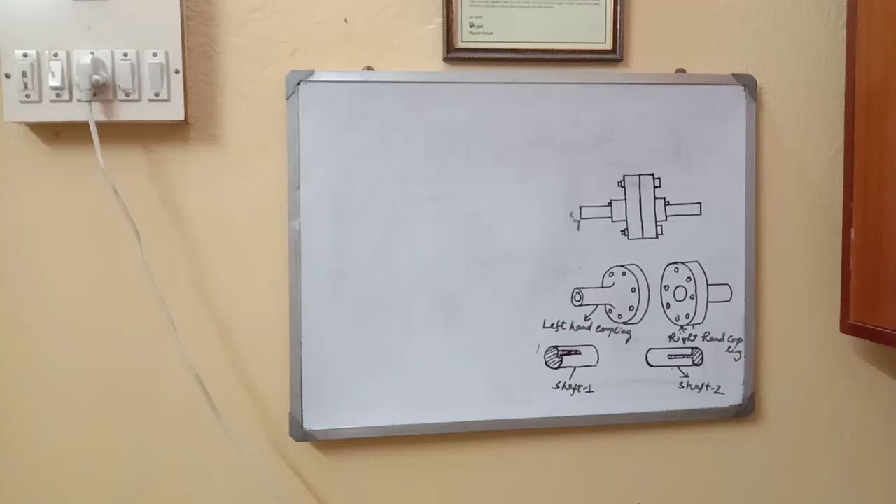Hello friends, today in this video I will discuss about the coupling.

See, when there is a shaft, as we know, the shaft is the rotating member. When the length of the shaft is too long, then we don't make the shaft in a single piece, because it is difficult to transport such a shaft. So, for simplicity, what we do is make the shaft in two pieces. That is, instead of transporting a complete length of the shaft, we divide it into two halves, and these two halves connect with a device which is called coupling.

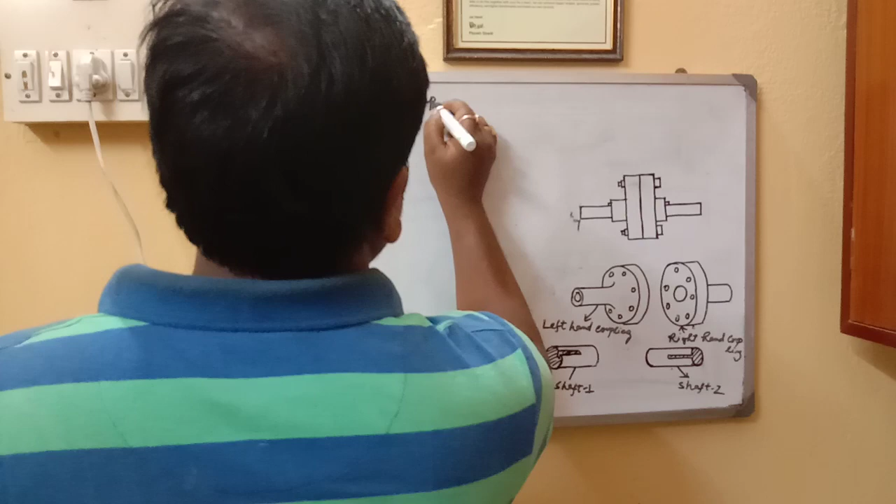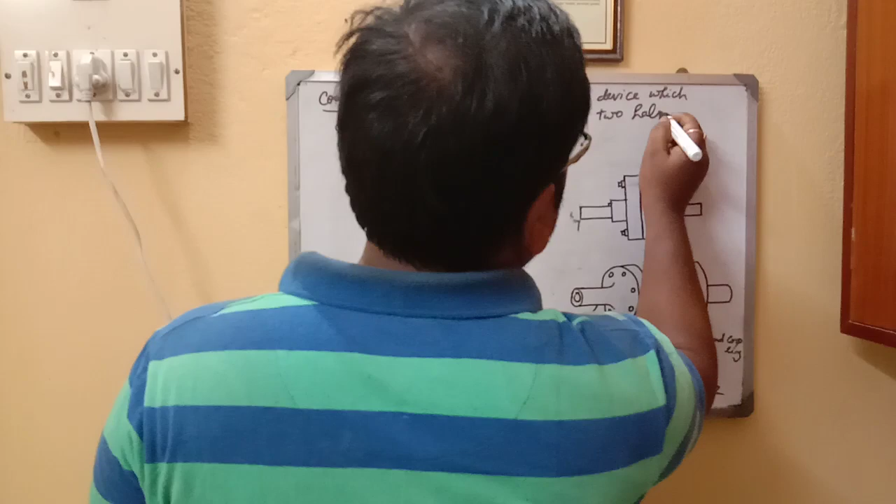So coupling is the mechanical device which connects the shaft which is in two halves. So coupling is the mechanical device which connects the shaft which is in two halves.

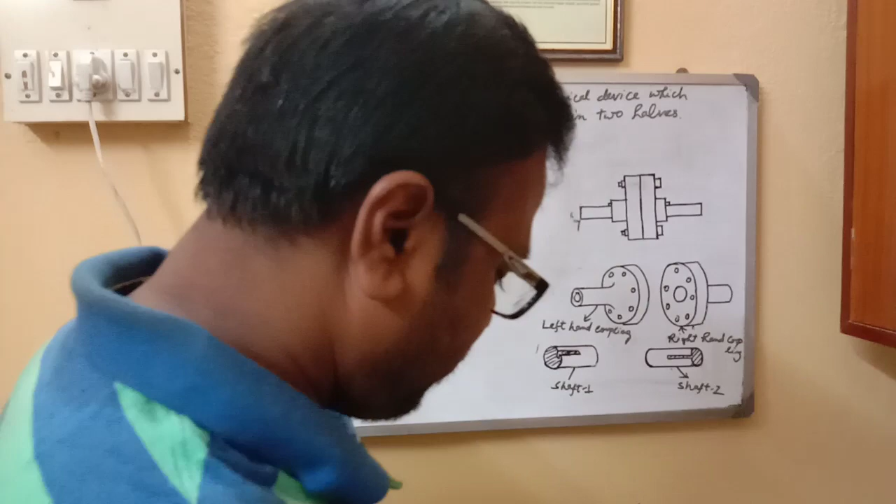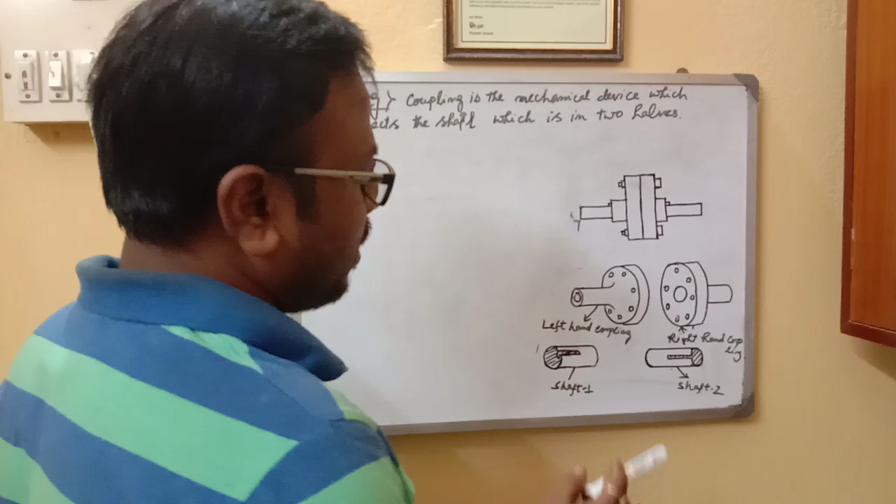So friends, here you can see the diagram. This is shaft 1, this is shaft 2. This is left hand coupling and this is right hand coupling. Here the coupling is in the left hand side, so it is left hand coupling, and the coupling is in the right hand side, so it is called right hand coupling.

Now how does the connection take place? Firstly we take shaft 1, which we insert in the left hand coupling using a key, and after that we take shaft 2, which we insert in the right hand coupling using a key. Half portion of this key will be in the shaft and the other half portion will be in the coupling. Now after inserting the shaft in this coupling, we join this coupling.

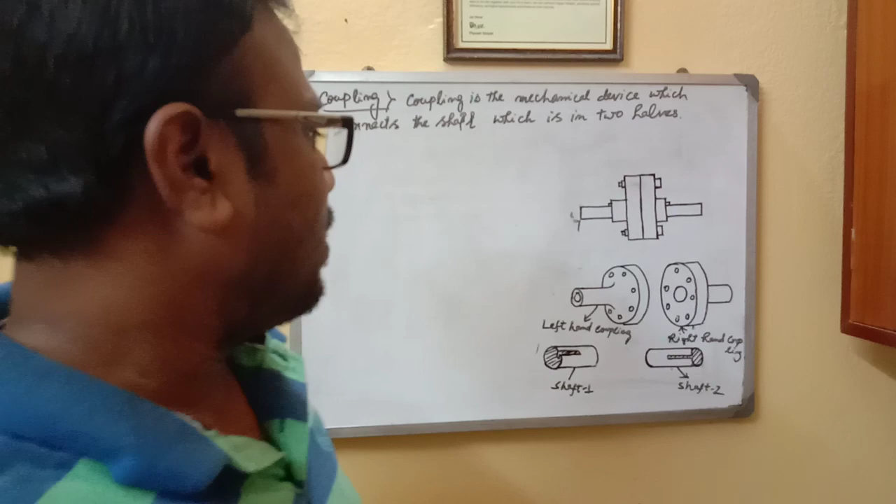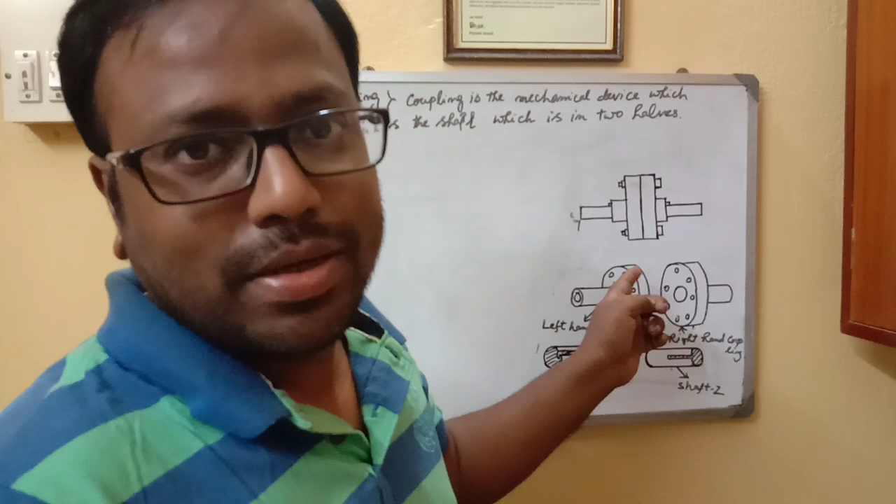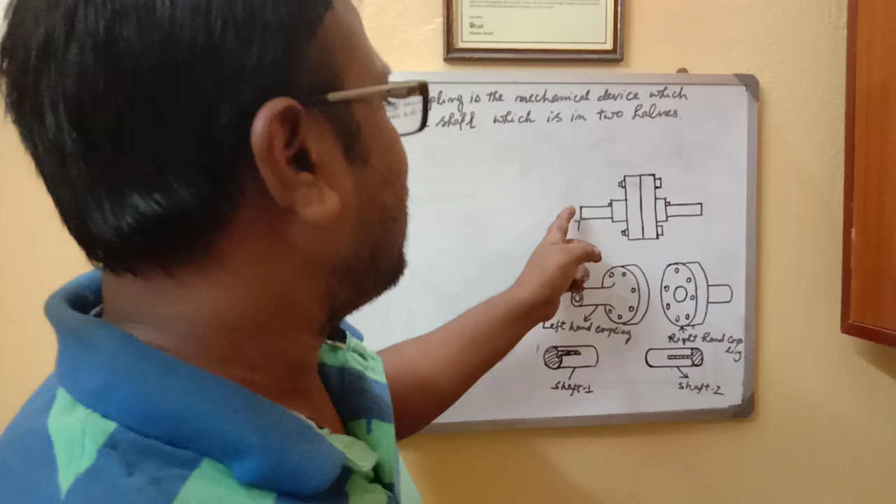Now friends, you can see here the number of holes provided on the coupling, and these holes should be aligned. After aligning these holes of both couplings, we insert the bolt, and after that we use the nuts for tightening, so that it becomes a single unit. Now it will look like that. Now we give the power to any one of the shafts, and that shaft will rotate the other shaft, and power will be transmitted through this coupling.

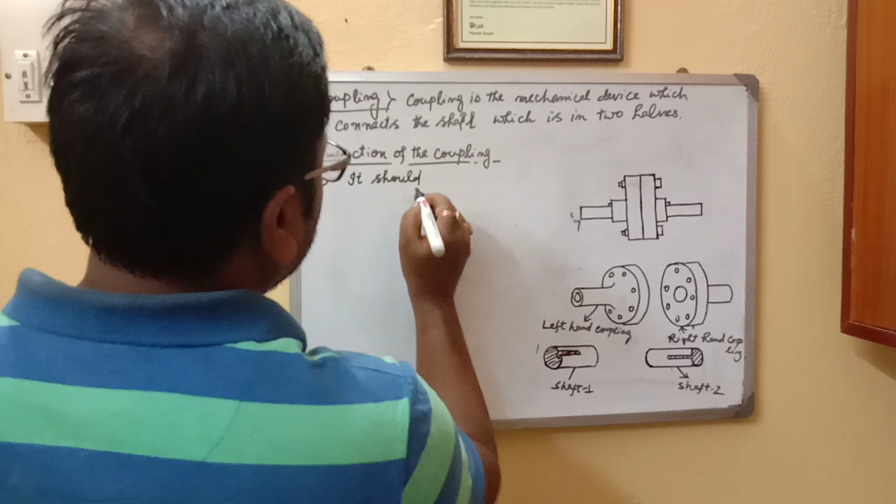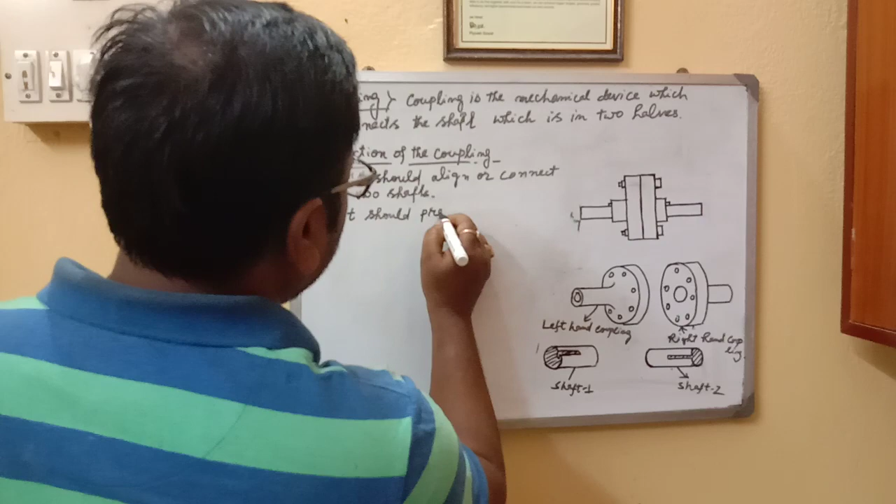Now friends, we will discuss about the functions of the coupling. Number one, it should align or connect the shaft. Okay, it should align or connect the shaft. Number two, it should prevent shock loading.

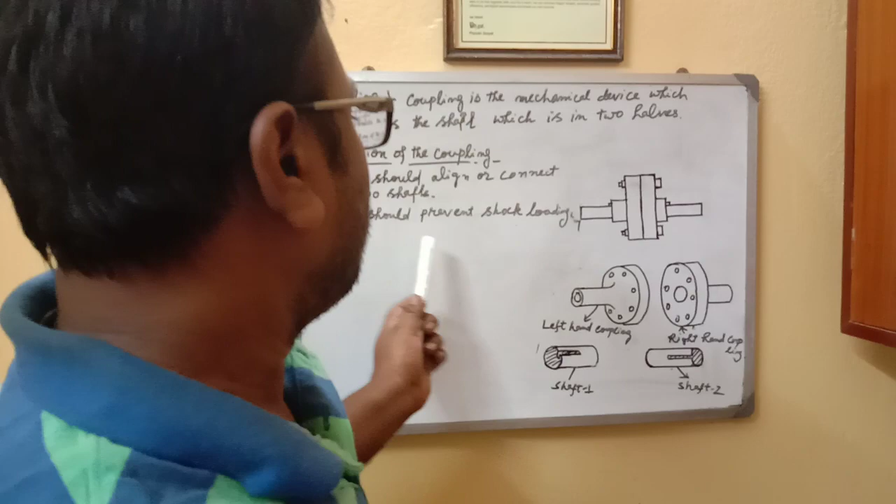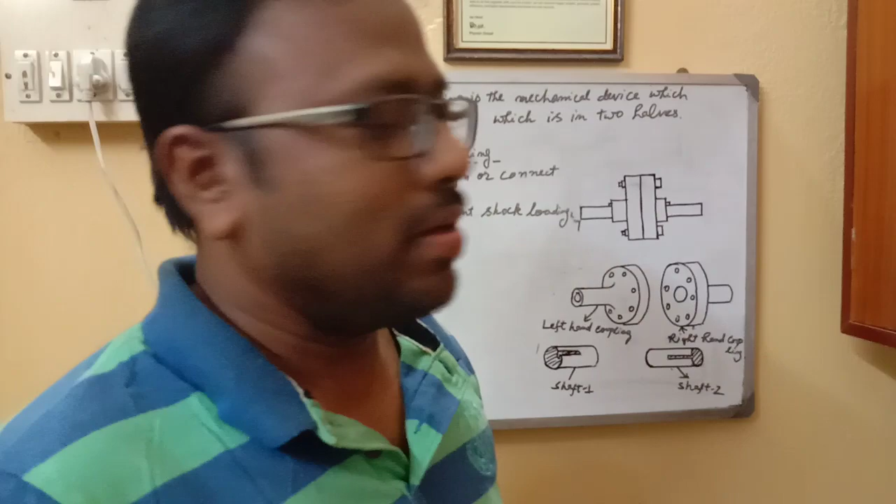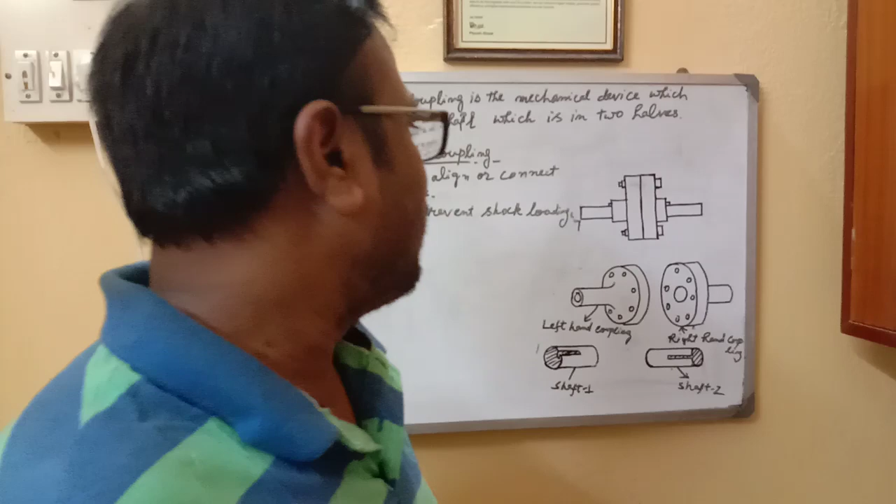See, shock loading means when we give the power to any one of the shafts, the power will be transmitted through the other shaft, and there is some amount of time gap. The shaft should not suddenly start to rotate. The shaft will attain the speed gradually, and if the shaft starts suddenly, there will be a chance of shearing the shaft.

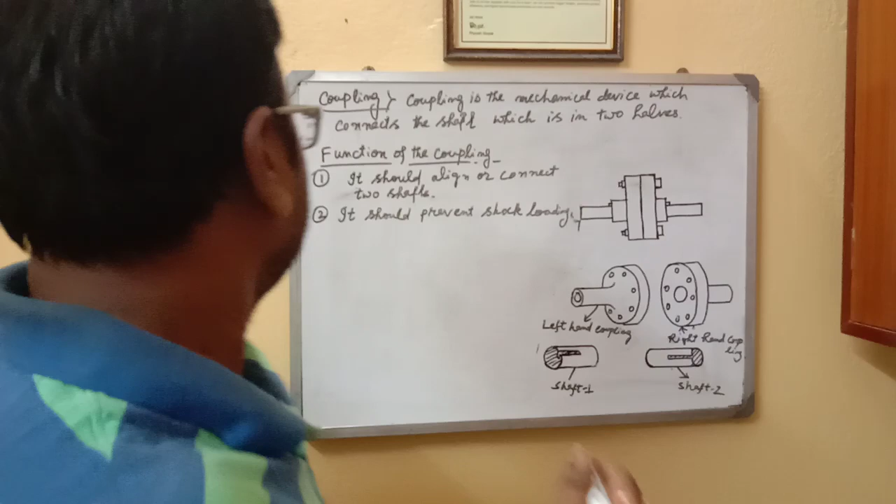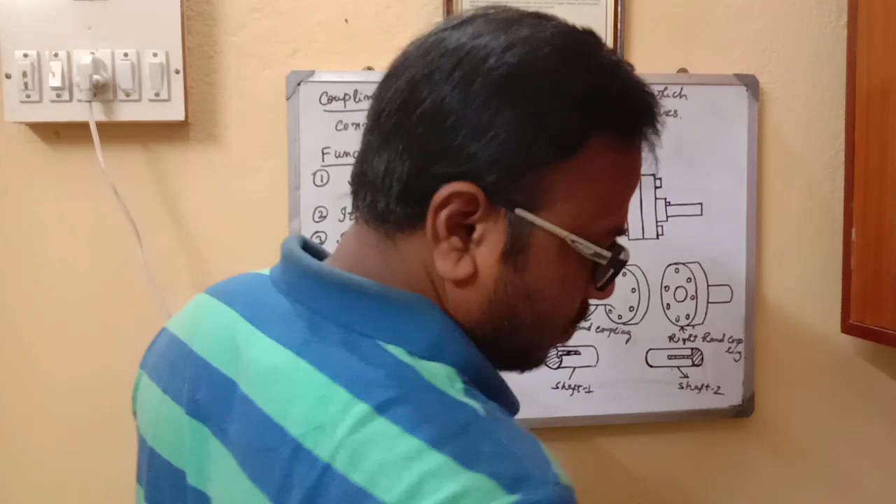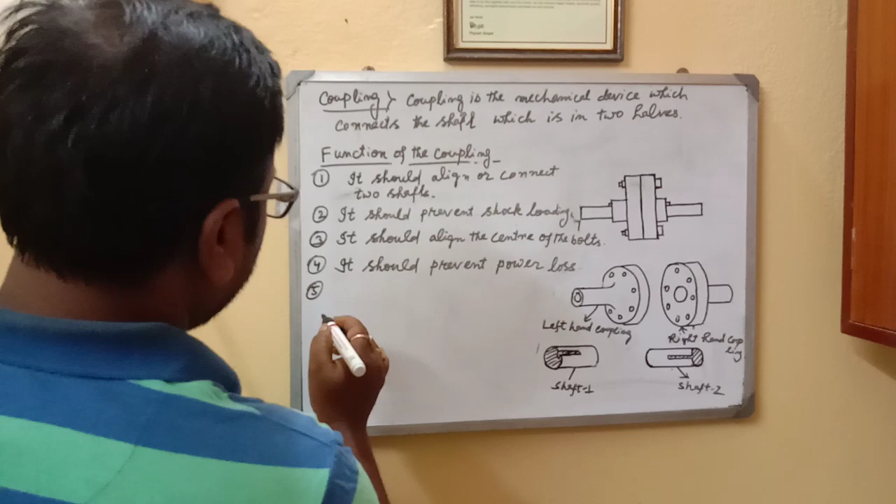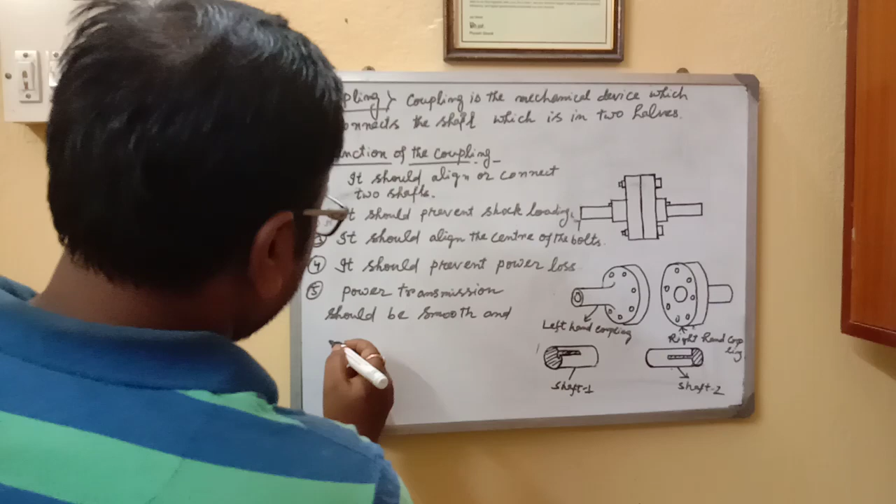Number three, it should align the center of the bolt. If the center of the bolt is not matching, there are chances to shear the bolt. Number four, it should prevent power loss. Number five, power transmission should be smooth and avoid noise.

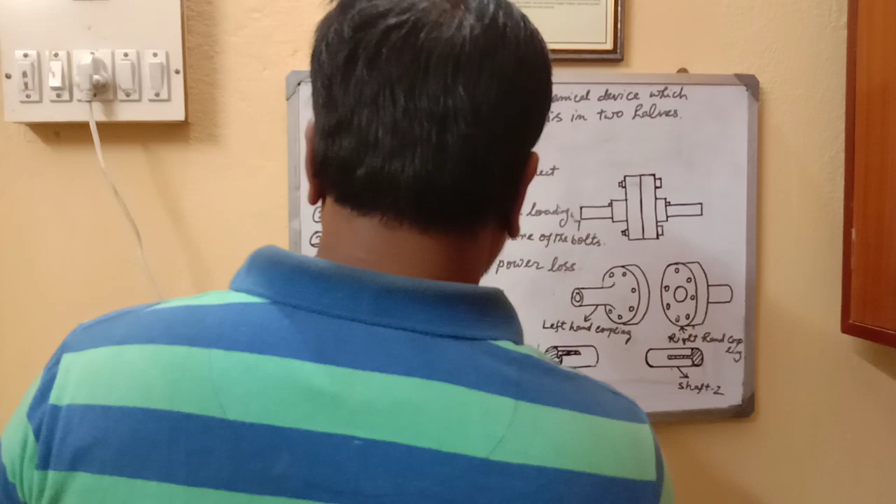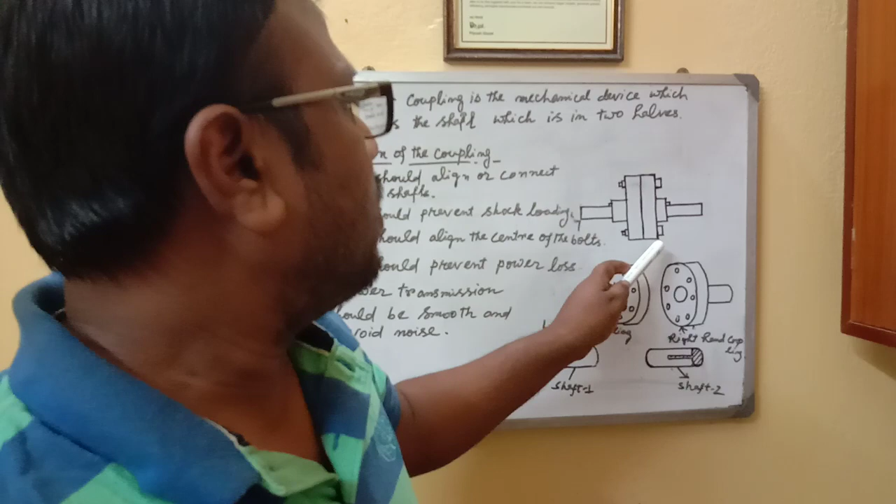See friends, there are chances of shearing of the bolt of the coupling, so it can happen that it hits the other member close to the coupling. So we provide a protective cover on the coupling which hides the head of the bolt.

So I hope friends all of you have understood, and here we have seen what is the coupling and the function of it.